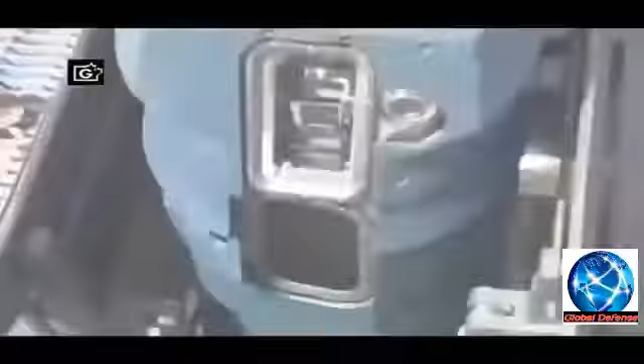The future of submarine warfare is here. The USS Virginia, tricked out with high-tech capabilities that allow it to sneak up to a coastline and secretly watch and listen to potential enemies, ready to respond with unwavering force.

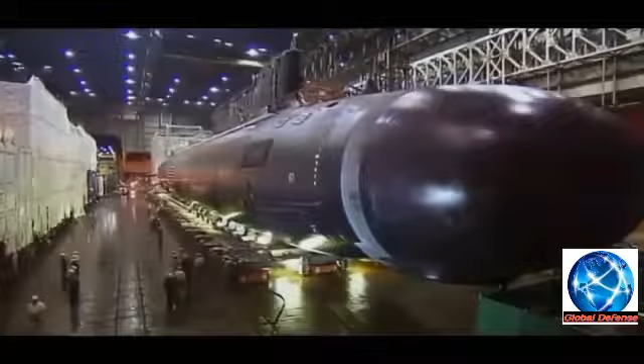This mega sub is in a class of its own, the all-new Virginia class. This is an amazing ship. Named the USS Virginia as the first of a new class, this amazing sub has staggering capabilities. It's the most advanced and versatile submarine in the world. We consider this like the Ferrari of the subclass.

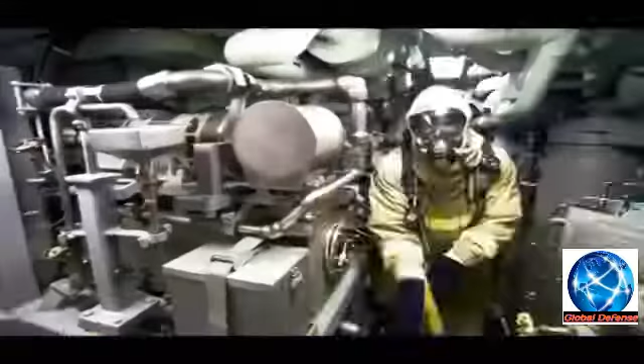It's one heck of a weapon. It can launch attacks on other vessels using devastating torpedoes and can deliver cruise missiles 1,600 kilometers inland with pinpoint accuracy.

To escape potential enemies, the USS Virginia can dive to depths of up to 240 meters.

But what elevates this new supreme sub to a class by itself is its astonishing spying ability. This sub has been called the ultimate eavesdropper, and for good reason. The Virginia has the most sophisticated sensors ever fitted on an American submarine. It can see and hear better than any US sub ever built.

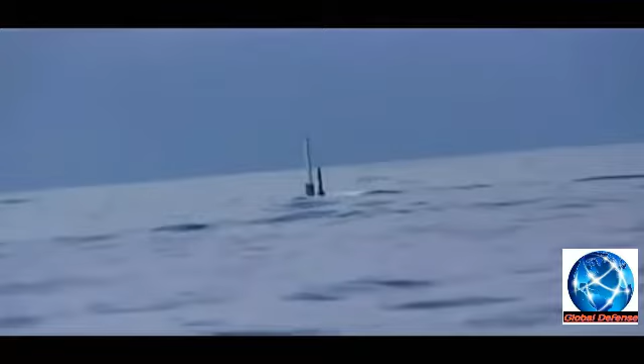But even with such technology, the Virginia must get in close to potential enemies. And she does, extremely close. She uses a revolutionary automatic navigation system, which allows the Virginia to inch itself through shallow waters to an exact coordinate. The question for a Virginia is how slow can you go? How well can you take that 8,000-ton submarine and control it in coastal waters a couple feet off the bottom? Can you move that ship inch by inch?

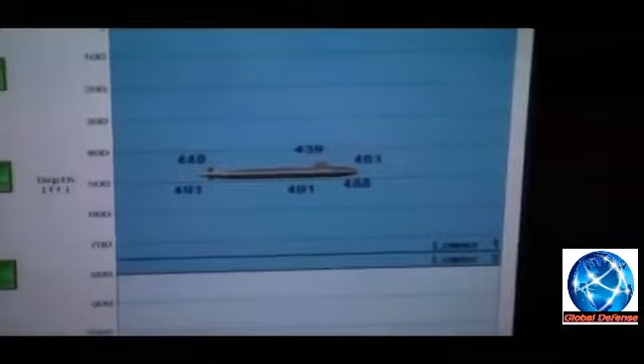Like a stealth fighter, it has the ability to remain undetected. But unlike the stealth, the Virginia can stay motionless underwater for up to 3 months if needed. And we could be sitting there for days and weeks and years, and you'd never know we were there. This is a sub like no other.

With such covert potential, the Virginia's intelligence gathering is second to none. It can also deploy elite forces like Navy SEALs at a moment's notice. Such adaptability makes this sub one of a kind.

And the USS Virginia is one heavy sea creature. At 7,800 tons, it weighs as much as 1,600 killer whales. This monster sub is 115 meters from stern to bow. If you were to lay the Statue of Liberty down next to it, the Virginia would still outstretch it by 22 meters.

But how does such a beast move so effortlessly underwater? The dynamic thrust of this megastructure is a nuclear reactor. The design and operation of the reactor is top secret. But what we do know is that it's an astonishing powerhouse.

A compact nuclear reactor converts seawater to steam. The supercharged steam then spins the massive turbines, which in turn propel the sub. The reactor also powers all electrical needs for this high-tech super sub. And what's more, the nuclear reactor on the Virginia has a 30-year lifespan. Translation, it can go that long without ever needing to be refueled. That's twice the average lifespan of nuclear reactors on other US attack submarines.

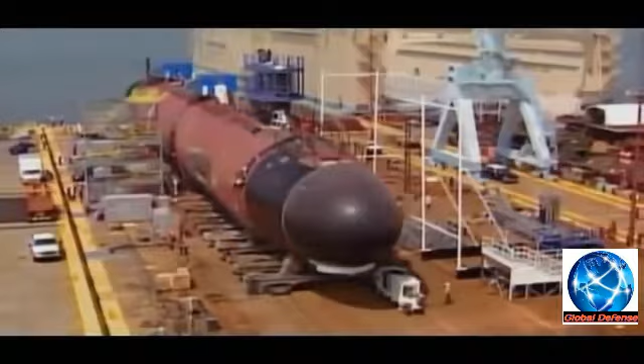But as the 1990s develop, new enemies of the United States and her allies emerge. Small terrorist groups in tyrannical countries like Iraq and Somalia cause the military to rethink spending. If you look at the threats we're dealing with today, a lot of the threats are coming from third world countries, small countries, where we need to take the battle to them and prepare a battle space around their coastlines. What is the point of a huge navy if these terrorist armies have no sea power? Why does the US Navy need a submarine at all?

Good question, and one that was being discussed at the highest levels in the early 90s. In today's complex world, the military needs to be ever more informed of enemy activity. But US defense already has sophisticated spy planes and satellites. They can see every detail from several kilometers high. They also have better ground reconnaissance and a superior spy system. So what can a submarine offer?

In fact, submarines have a lot to offer. The Navy is aware that if they can harness new but unproven technologies, the submarine could remain in shallow waters completely undetected. And what's more, the super spy could stay there for weeks, even months. If a new mega-sub can listen and stay close to enemy lines, it can still be an important military asset.

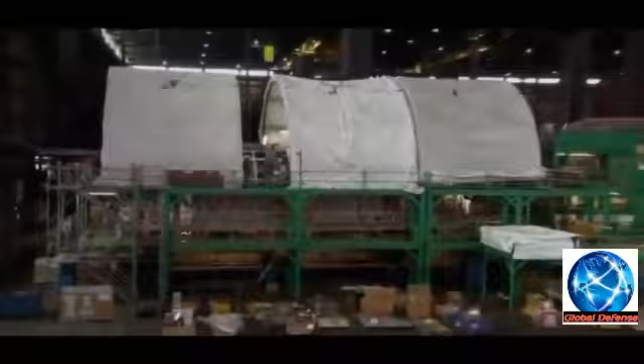It's a tall order by any standards, but there's a catch. They have one year less than it took to build the first Seawolf. And incredibly, there's an even bigger catch: it has to be made for 20% less money. With such constraints, there were many in the submarine industry who thought it was simply impossible. I think the reaction is always one of, how can we do that? We've never done it before.

If the Navy can make this work, it'll provide a major new weapon in the US arsenal. But if they fail, all US subs could be in question.

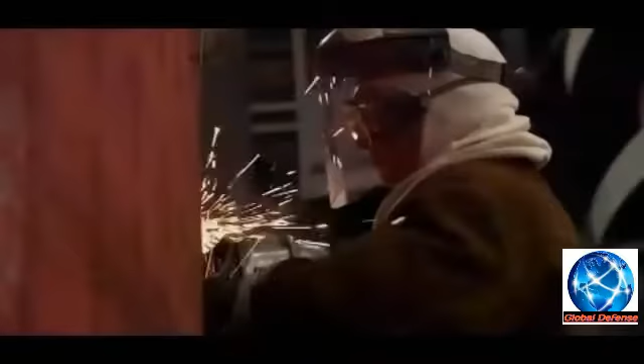It's 1996. The US government needs to get up close and personal with new terrorist enemies. The Navy insists that submarines can still help in this thorny urban war. They claim they can build a new class of submarine: bigger, better, quieter, and more deadly. But there's a catch, a big one.

It must be built in less time and for a great deal less money than the previous attack submarine, the Seawolf class. With such limitations, this project looks more likely to sink than float.

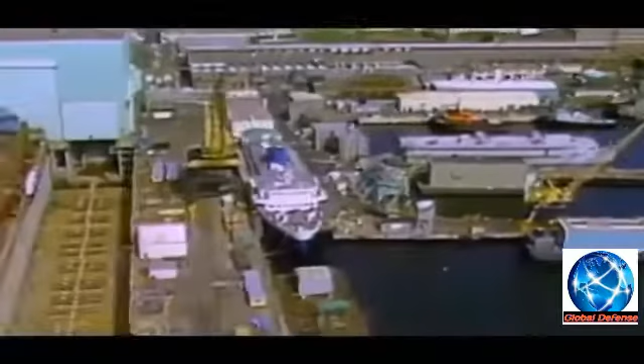The Navy decides to offer the mammoth design challenge to a trusted company, Electric Boat. Based in Groton, Connecticut, this company has enjoyed bragging rights that span over a century of ship and submarine building for the U.S. Navy. The first sub they built was the USS Holland for the Navy in 1900. The USS Holland revolutionized the U.S. Navy, marking the beginning of more than a century of military submarine building.

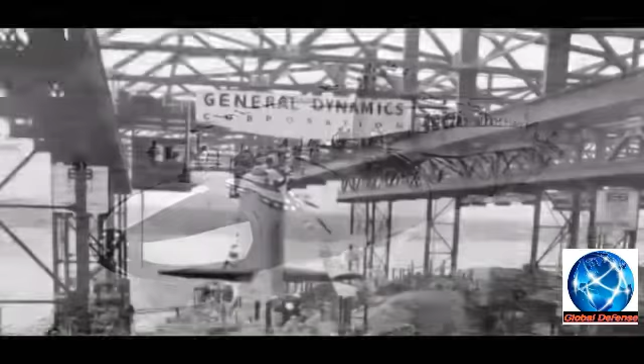Electric Boat's expertise is second to none, but some government officials already fear that this massive challenge may simply be impossible. Despite the huge red flag, Electric Boat finally agrees to design and develop the new Virginia class. But to bring it in more cheaply than the Seawolf, they'll have to completely change the way submarines are built.

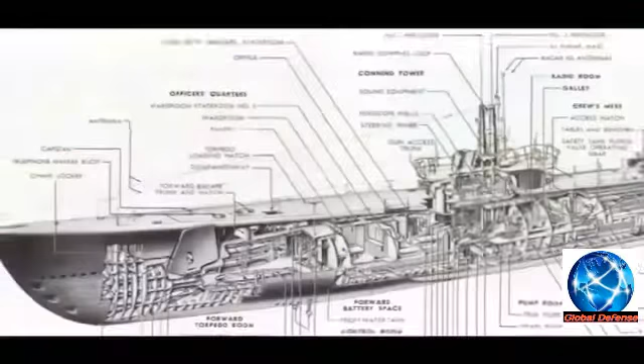It starts with paper and wood. In the past, they would have drawn up initial plans on paper. Previous classes of submarines were designed historically, like probably any other large construction project, with two-dimensional drawings, blueprints.

But the problem with two-dimensional plans is that different designers can't always view each other's layouts. If two engineers from different departments end up competing for the same space, it could lead to lengthy and costly delays. On this tight schedule and budget, there's no room for such error. It'll put the project behind schedule even before it started. It could tip the balance and mean the end of the new super sub.

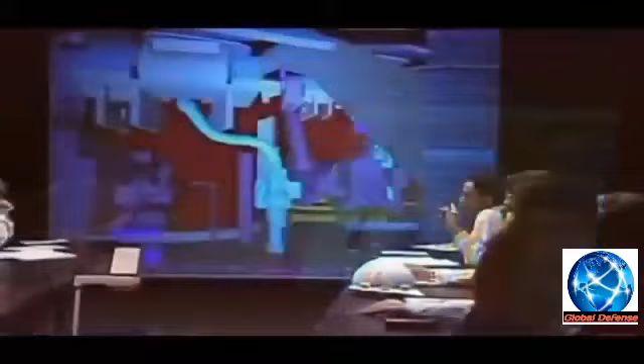The team needs another solution. They turn to new computer-aided technology, the benefit being that the whole model can be seen in 3 dimensions. This will mean that each department can quickly see what the other is doing. If it works, it'll save the company a fortune and help design a more efficient sub. But if it doesn't work, it could mean the new super sub is doomed from the start. The president of Electric Boat finally decides to take the risk. He came in and finally took all the drafting boards out of the plant and said, okay, go for it on your computers.

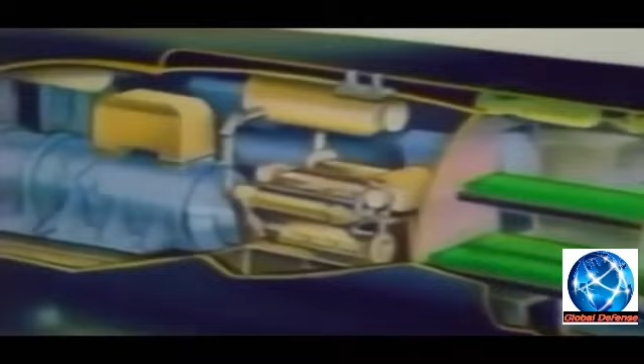Before the Virginia class, when a submarine was designed on paper, builders would then construct a life-sized wood mock-up of the plans just to make sure everything fit. But with the computer-aided design of the Virginia, that step could be skipped. All of the test fitting could be done right there on the screen. It is the first time that a U.S. Navy submarine is completely designed via computer.

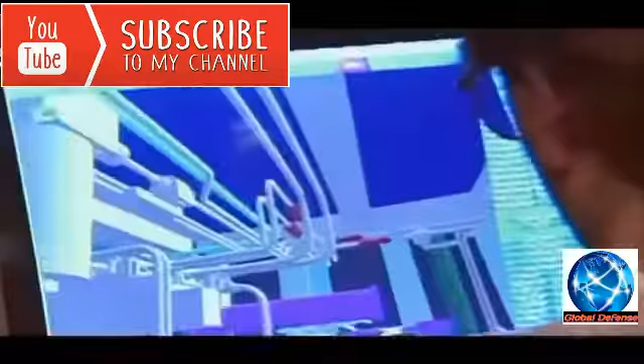And the program that would make this computer-aided design possible is already proven technology. Known as the CATIA program, it has effectively been used in the development of airplanes by the Boeing Corporation. Electric Boat figures there are enough similarities between a plane's fuselage and a submarine to take the plunge.

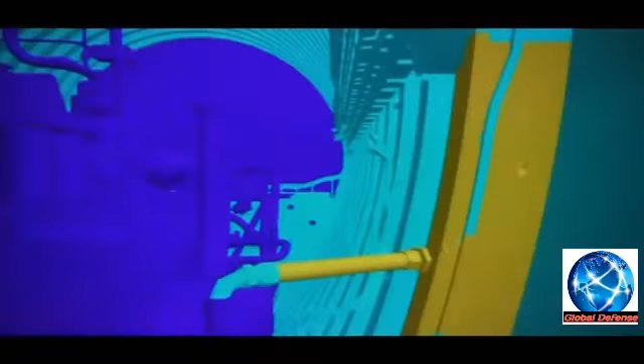It proves to be the right decision. All the various designers have access to the computer 3D model. This allows engineers to work in the same virtual space at the same time. Designers can now view all the plans to make sure they don't interfere with other layouts. The piping designer is running his pipes and I'm running my cables. We can go in and detect interferences day by day.

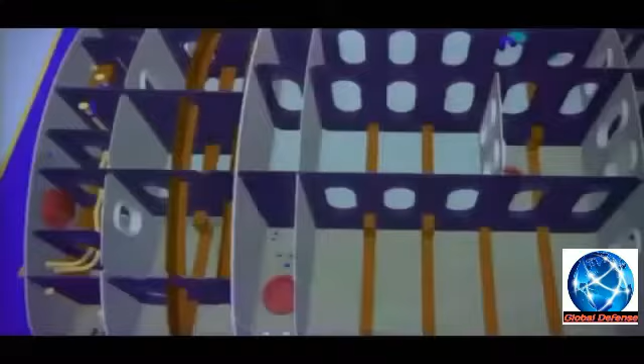Every part of the ship is scrutinized for function and economy. So creating the sub on a computer seems to allow for the more efficient test fitting of systems and parts. But the next challenge facing designers is figuring out how to create spaces for people. Workers need room to do installations, and sailors need space to do their jobs. So in order to ensure those spaces are adequate, designers welcome the help of this guy.

Meet ErgoMan. ErgoMan is a computer-generated image of a human being that comes in 3 virtual sizes: 1.7 meters, 1.8 meters, and 1.9 meters. Whatever movements a human can do, ErgoMan can replicate. Then, when the ergonomically correct envelope has been pushed and a movement is made that is not humanly possible, ErgoMan clearly lets engineers know by simply turning that body part red, enabling the designer to adjust the space he's working on.

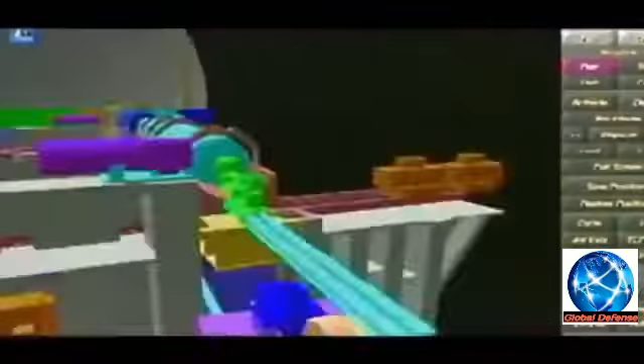This revolutionary technology could save the company millions in costly redesign. It could also guarantee that the crew will operate at maximum efficiency. The computer-aided design also helps in one other crucial way. The future of warfare is uncertain. To meet that uncertainty, this incredible sub must be able to adapt to new situations. As modern warfare changes, so the Virginia must adapt to meet it head-on.

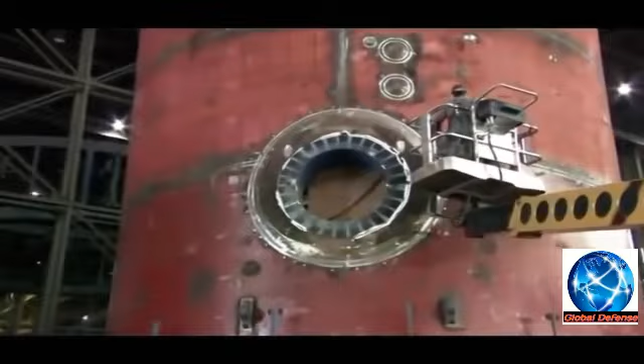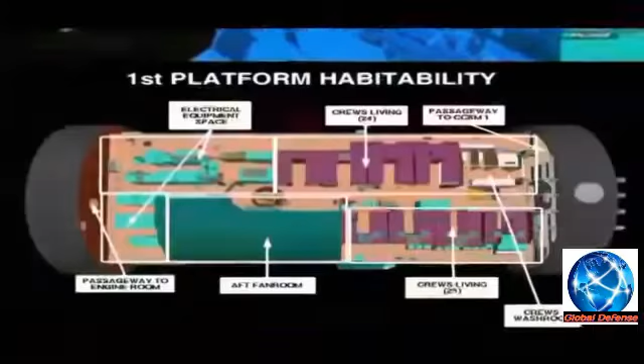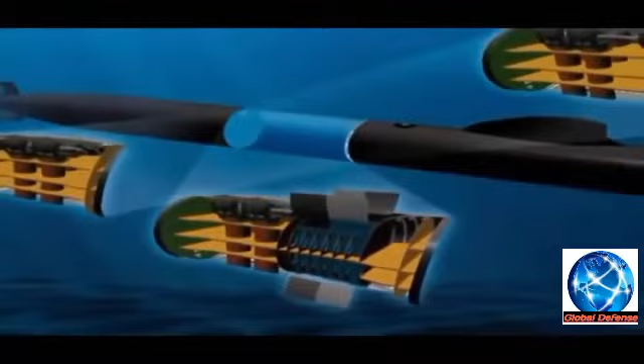To create this adaptability, the designers of this super sub create what's called a modular design that incorporates an open system architecture, meaning the skeletal structure of the sub includes large open spaces. These open spaces can house prefabricated modules such as weapon systems or sonar technologies. These modules can easily be inserted as one complete unit. This modularity will allow future versions of the Virginia-class to house newly developed systems in the existing Virginia-class layout, without the added expense of having to develop an entirely new class of submarine to house new technologies and capabilities. A remarkable cost-cutting development in the design of a submarine.

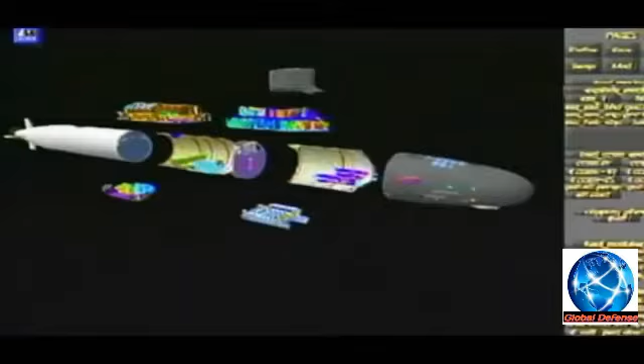If it works, this will be the most extraordinary submarine commanding the world's oceans. But designing it is just one problem. Making this ambition a reality is quite another. With an even tighter budget than past submarines, this is going to be a massive challenge to execute. And now there's a new problem. Having spent millions on the design, the Navy may not have enough money left to build it. It looks like the prototype of the new Virginia class may never surface.

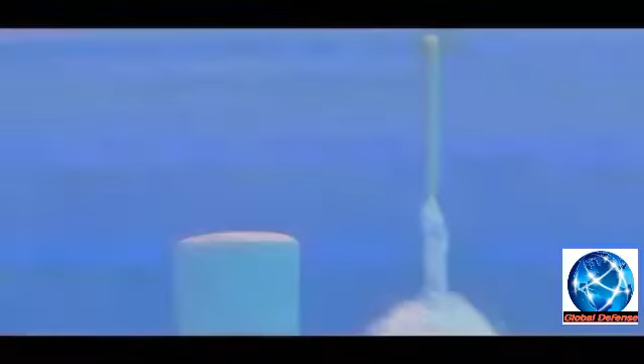The Navy is underwriting an enormous new project to build a new class of submarine that will be more versatile than any ever built. But it has to be constructed in less time and for less money than the previous attack submarine, the Seawolf.

The design and development have been skillfully and successfully carried out by Electric Boat. And for the first time, a US Navy submarine is completely designed via computer. It's a massive achievement, but there's a problem.

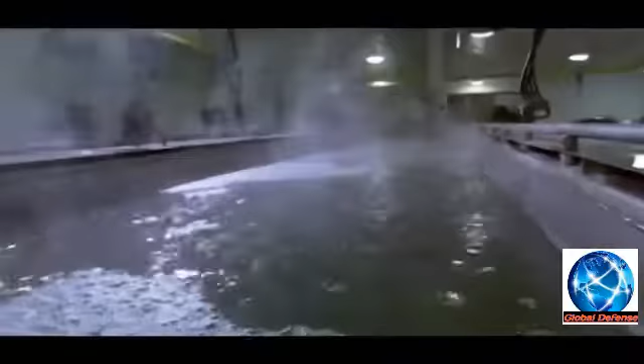The Navy's budget for the Virginia program is running out. It could lead to the end of the new super sub before it's even floated. But then Electric Boat does something unprecedented in its history.

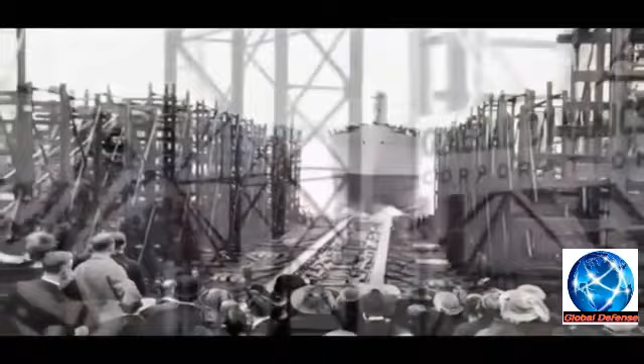For years, Electric Boat has been in competition with Northrop Grumman's Newport News, another heavy hitter in the shipbuilding industry. Now Electric Boat proposes that they combine forces with their old rivals and do something that's never been done before: build the submarine together, a process they call teaming. They figure that combining resources and brainpower will allow them to work more quickly and more efficiently. The proposed alliance can lead to massive savings, $700 million off the cost.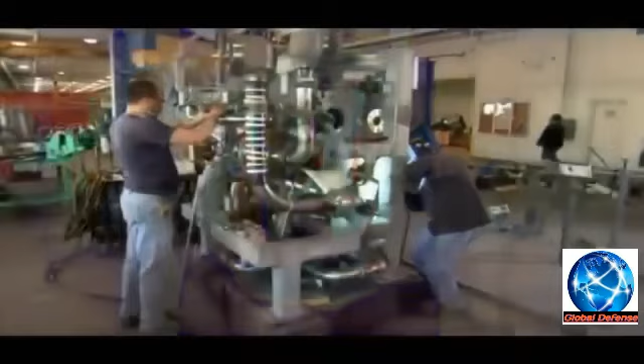But can these two historic adversaries put aside their differences and build a super sub for a reduced price? How can they manage such a massive project across two companies? As we've said, it's never been done before. But the allied companies must make it work. They have little choice, as the Navy has no more money to offer.

Making a super sub for less money and in less time than previous attack subs will only be possible if the two rivals collaborate. It's a colossal and dangerous undertaking. If they get it wrong, it could spell the end of the US submarine program. This is a time when the Navy must prove a submarine's worth in a changing world.

The two-company alliance agrees that the only way to meet such demands is that there can be no delays. A major setback could erase any cost savings. But such efficiency in submarine construction is unprecedented. Is this project simply too ambitious? Could it be destined for the deep?

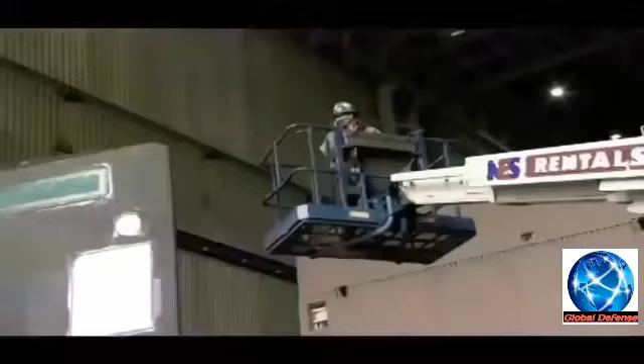In 1998, construction finally begins. Like all submarine building, it begins with the most crucial component, the hull. This is where the crew and weapons are housed. If it's not strong enough, the lives of hundreds of men are at stake, as is the multi-billion-dollar submarine.

Not just a costly mistake, it would be a national catastrophe. Consequently, the hull for this sub isn't just made out of simple steel. It must resist unbelievable pressure.

The Virginia class needs to reach depths up to 240 meters. Here, it's difficult for an enemy to find them. It'll give the submarine maximum safety from attack or detection.

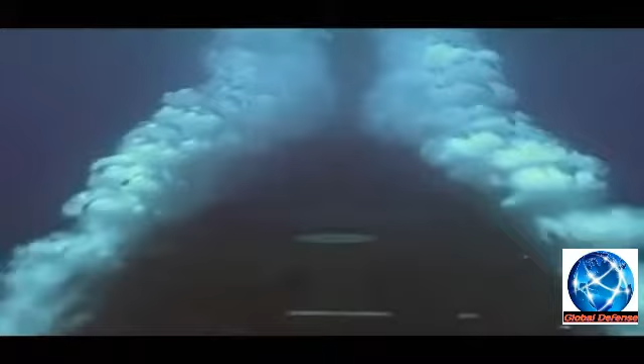But at these depths, there's immense pressure. The steel hull must withstand a massive 26 kilograms of force per square centimeter. That's the equivalent of a dinner plate strong enough to hold up the weight of an elephant.

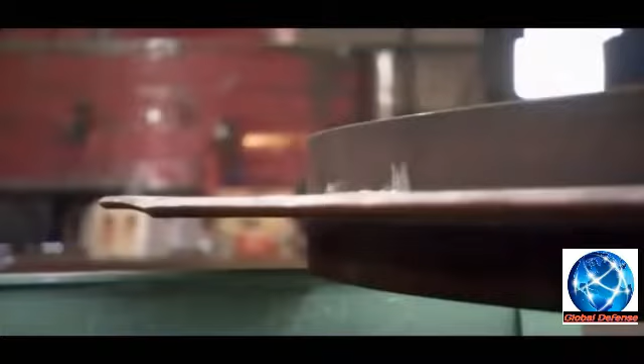Getting the steel strong enough to endure such pressure is crucial. The manufacturing of this special metal is a military secret, but suffice to say, it's strong. Extremely strong. But now the problem is how to bend such heavy-duty steel.

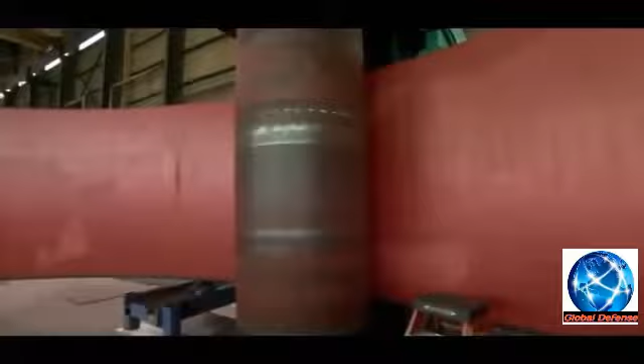They use a machine that supplies up to 4,500 tons of pressure. That's over 30 times the pressure exerted by a car-crushing machine. The massive drum shapes and bends the huge plates of steel.

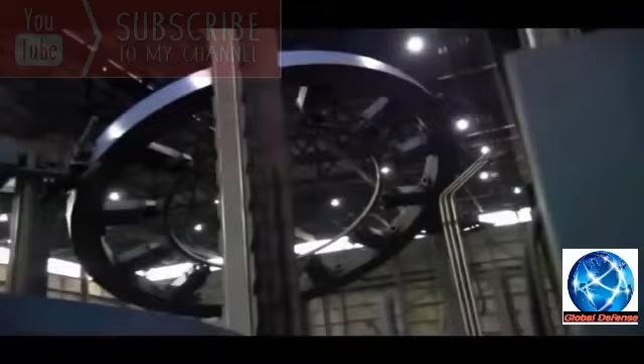Once bent into shape, the steel is mounted onto rib-like frames. It's then welded together into cylinders. This is a critical moment.

In the past, this was done by teams of hand welders. But such are the stresses on a deep ocean submarine that even one bad weld could lead to disaster.

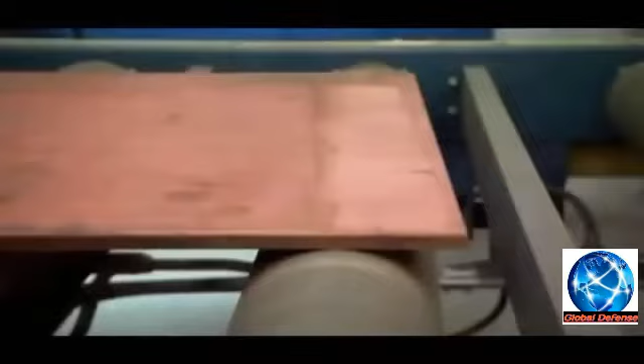There's only one answer: robots. These assembly robots can work round the clock and rarely make mistakes.

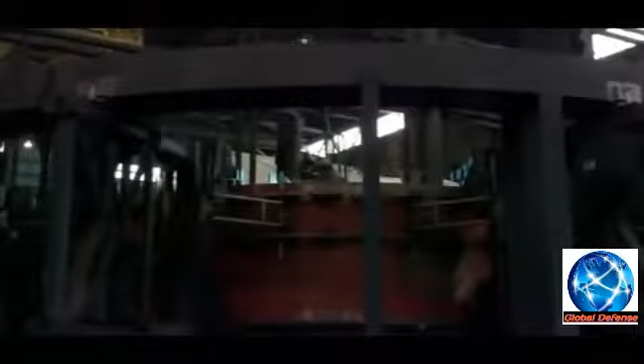The weldments that go in out here are better than 99% first-time yield, which means the inspection process shows less than a 1% failure rate. It's a costly business, but this is something that can't afford to fail at any price.

To make sure the welds are perfect, they're inspected by X-ray. Any imperfections, such as an air bubble in the weld seam, could be just enough for the hull to weaken. It could then give way to the crushing forces exerted deep below the surface. If the X-ray machine shows up any imperfection, it's meticulously repaired.

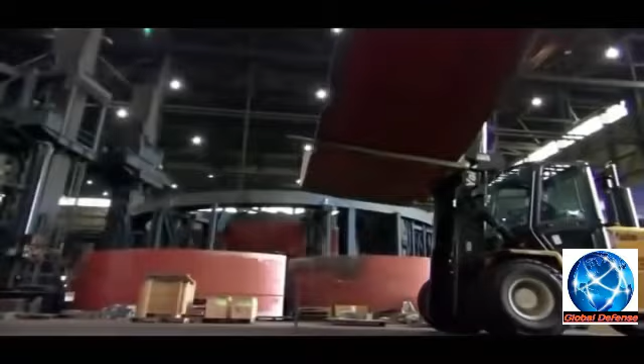Amazingly, once the seam is perfect, the welds can create a bond that is actually stronger than the original steel, a comforting fact when you're 240 meters below sea level. Once the separate sections of the hull have been created, they start to construct the skeleton.

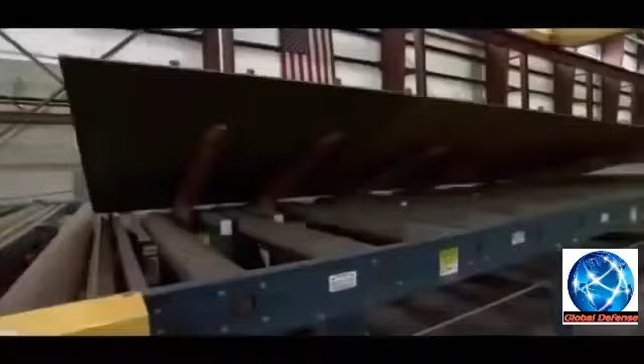Here in steel processing, they'll make floors, walls, and all the sections that comprise the submarine's framework. Robotic manufacturing reduces mistakes and speeds up the process. This is crucial when the alliance companies are desperate to cut costs and time.

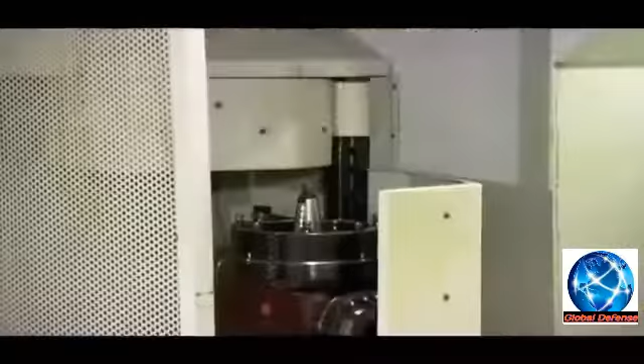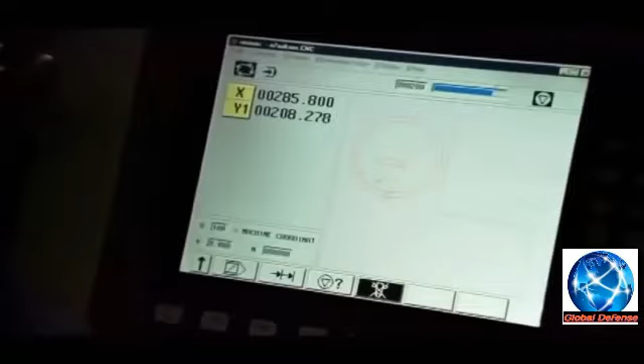Today, modern technology means we're working with electronic data that comes right over the line and feeds the machines. This incredible laser marker is one of a new generation of robotic assembly tools, designed to eliminate human error. It's programmed to follow the computer design with better than pinpoint accuracy. Basically, it's the only marker of its kind in the free world that we're aware of.

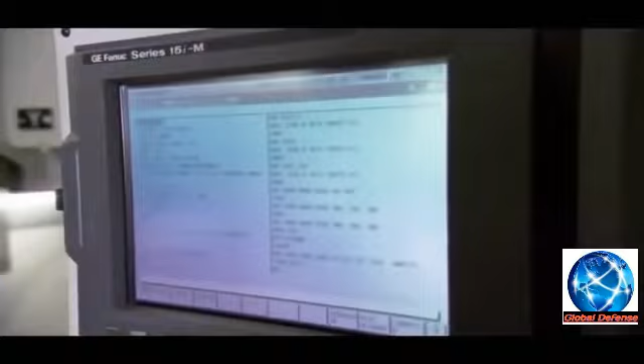But will this new technology work? It's never been used in submarine construction before. The machine passes quality control with flying colors. It's just one of many innovations in building this unique sub. So far, the project is going well.

Now the marked steel must be cut. But how do you cut such strong steel? They use a hugely powerful cutting machine known as an abrasive water jet.

Here, a constant stream of water acts as the propellant for 80 grit flakes of garnet, which cut through the steel. The advantage to this method of cutting with a cold water propellant is that there is no heat-affected zone, thereby eliminating imperfections caused by expansion, contraction, and melting.

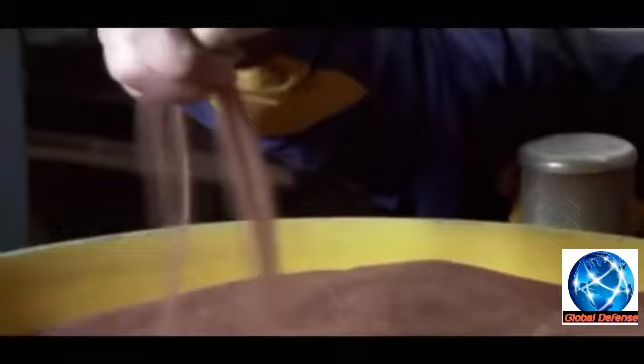Even though garnet is not the hardest abrasive that could be used, it's seen as optimal because it's hard enough to cut without causing too much wear and tear on the water jet's nozzle. The powerful cutting stream strikes the steel with 3,900 kilograms of force per square centimeter. That's strong enough to cut through a 30-centimeter thick piece of steel.

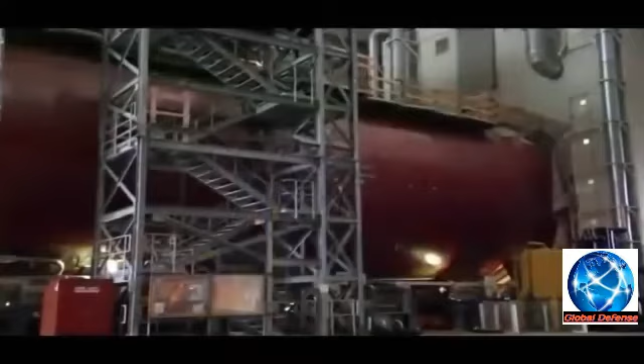Once cut, the sections are ready to be welded into place. This makes up the submarine's skeletal shape. While these sections are being built, other important modular sections are constructed in tandem. Living quarters and weapons are built outside the submarine before final assembly. This allows ease of construction, and each module can be rigorously tested before installation.

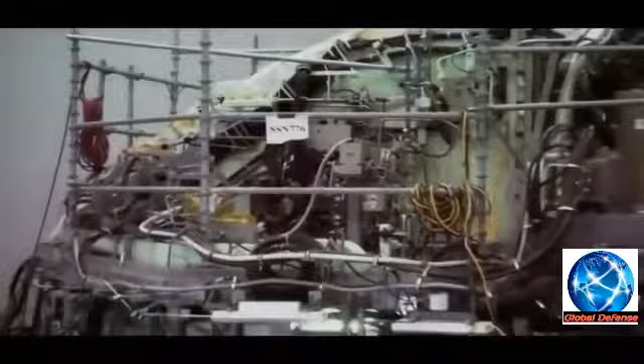The Virginia's command and control module is the most complex module to be built. It's the brain of the sub, where crucial functions are executed and surroundings monitored. It's also where the awesome weapons systems are controlled. If any part of this goes wrong, the whole submarine could be rendered inoperative and end in a voyage to the bottom of the sea.

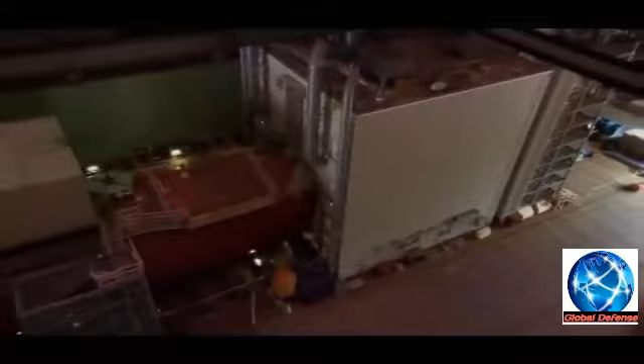So the Virginia's separate elements, the modular systems, the internal structures, and the outer hull are built with efficiency. But these separate sections have not yet been integrated into a complete submarine. And without a complete submarine, the sailors destined to serve on the Virginia can't set foot onto it and get a feel for its inner workings. Yet they must have a working knowledge of the Virginia's unique operating systems when they're charged with manning the complete submarine.

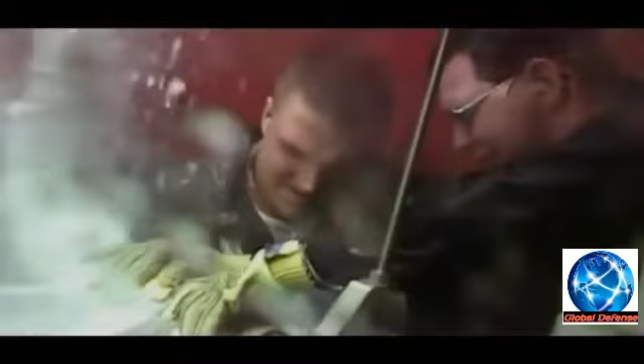So how do sailors prepare for duty on board this unfinished sub? The Navy would have to get creative to ensure that the human element to this mega sub, the US Navy submariner, would also be finely tuned for service. This is when the mission could sink or swim.

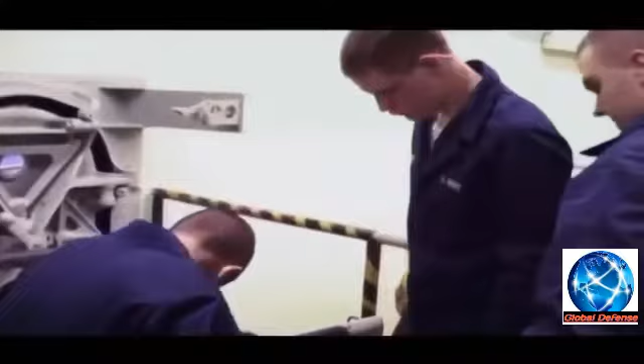The USS Virginia is a super sub in the making. Nothing like it has ever been built before, so there's no chance of gaining crew experience from other submarines. But the new sub must be fully tested before sea trials. That includes the crew. To operate this new class of submarine will require unique training. But this is a virgin sub, and no one knows all its workings. Like the rest of this project, this too will be a challenge for the Navy to resolve.

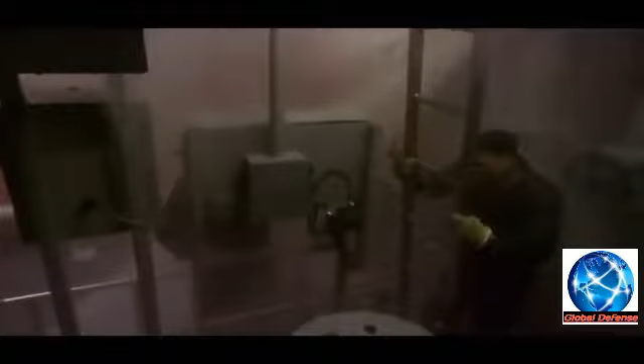Training begins with every submariner's nightmare, in mock facilities like this fake engine room, built to simulate a flood. Even though these men are not on an actual sinking sub, this scenario is very real to them. They know that a flood could happen when they're at sea, and the only way to survive it is to stop the water from rushing in.

Flooding in the engine room! When a sub starts flooding, it becomes a race against possible death for everyone on board. Flood control has been activated in the engine room. Phones are manned.

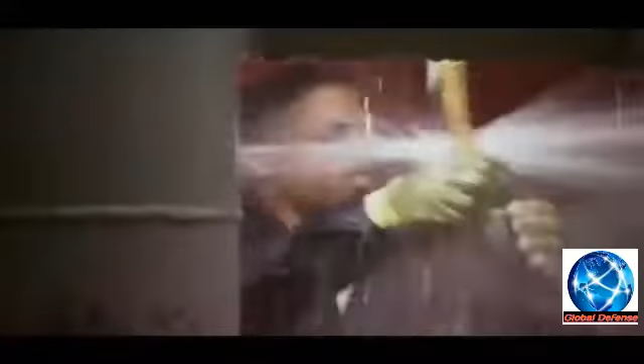In the heat of battle, the sub can't resurface because the enemy will spot it. If too much water gets in, the sub takes on too much weight, permanently ditching itself on the ocean floor. The men cannot escape through the hatch because they're so deep; the water pressure will crush them. If they can't stop the leaks, they will be trapped at the bottom of the ocean, buried alive in an iron coffin.

Hammer. These sailors are under the close scrutiny of their commanders. Slow down.

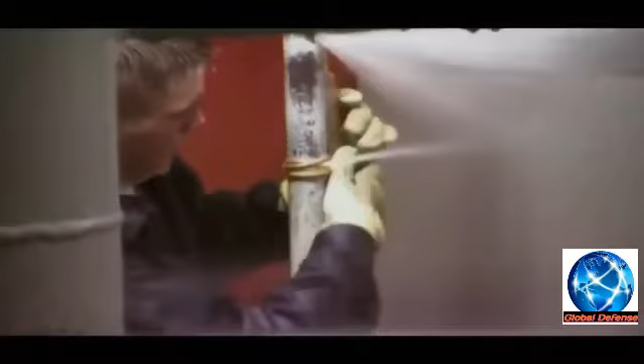To block small leaks in pipes, the sailors hold plugs in place with rope they call bandit twine.

For larger leaks, the sailors patch the holes with rounded metal plates called strongbacks, which are secured with metal straps simply called bandits. Don't take it apart, tie it up.

Commanders expect the sailors to keep their cool and keep their focus. Fortunately, after a rigorous and stressful series of tests, these sailors get the thumbs up from their commanders. These are good men to be spending months on end with, and that's what a sub is all about.

Living in cramped conditions and still functioning well in the face of danger. This is no place for claustrophobics.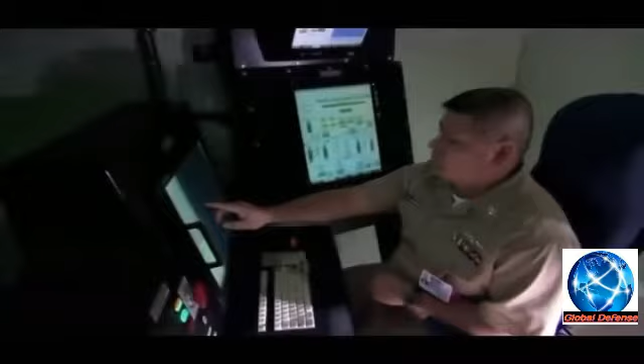Every detail of this high-tech simulator is a functioning replica of the future sub's control room. This is a very unique trainer. It's specifically for the Virginia class.

For the first time, the crew get their hands on the same controls as the new super subs. We were confident that the ship was going to act very similar to the trainer as far as motion, but the procedures and everything that we train on over here are identical to the ship.

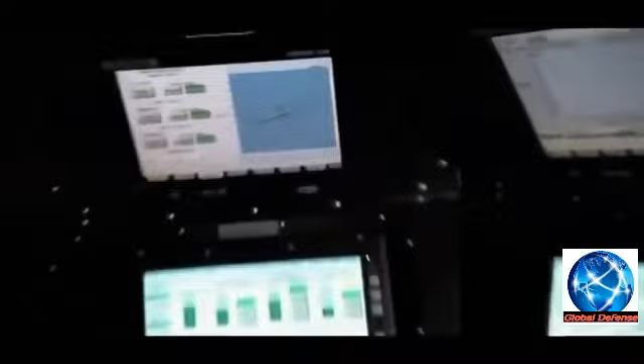All back to thirds. Sonar, no longer hold air.

One thing sonar operators on the new sub will have to get used to is working alongside their colleagues. Sonar has always been monitored in separate rooms to avoid noise interference.

Starboard. But sonar operators destined for the Virginia must get used to working in the new shared space of the control room.

Pilot sonar, no longer hold air, escaping from the aft main ballast tank.

After initial reservations, the sonar team begin to see the benefits of working with other engineers.

I think overall, in the big picture, it's a benefit. It gives me, as a sonar supervisor, a larger tactical picture of what the boat is doing.

And because they're all in the same room, communication is much more responsive. Control, and I'll brief them that we've gained an enemy warship.

While the crew is being put through their paces, construction of this super sub nears its end. The separate hull sections are outfitted with the internal elements they'll house. And then they're pieced together section by section until a full-length submarine finally emerges.

By August 2003, the USS Virginia is ready for the water.

Against all odds, the alliance companies have done it. They've built an extraordinary new submarine, more technologically advanced than any in the world.

It's an amazing achievement. Right now, any celebration could prove to be premature. Unless they get the next and most important phase right, the whole project could become an expensive flop.

Virginia must now endure extensive sea trials. The super sub has to prove itself where it really counts, in the ocean.

Often in the past, testing new subs has uncovered countless problems. These have proven to be time-consuming and extremely costly.

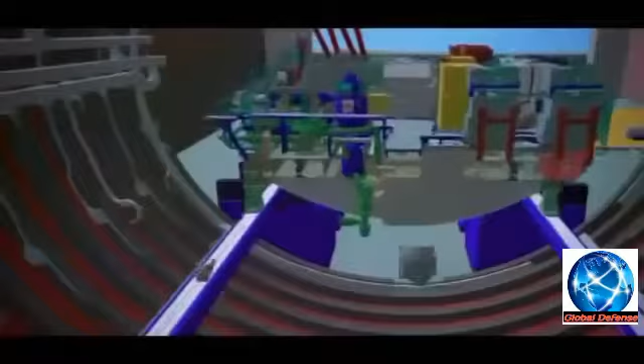The USS Virginia has been built using revolutionary methods. Time and vast quantities of money have been shaved off the budget.

But if this new super sub is to succeed, there can be no slip-ups during trials. It'll knock the whole project off course.

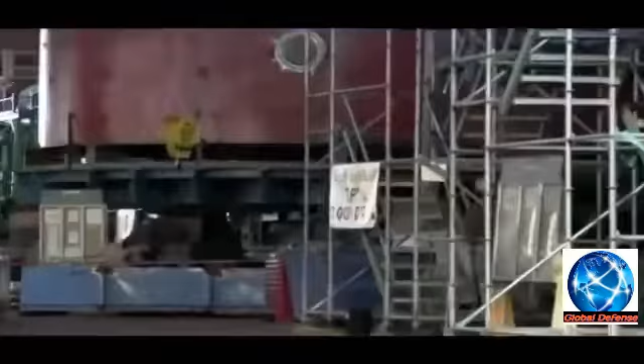The construction of the all-new USS Virginia is at last complete. It's taken 6 years and cost the Navy billions of dollars to build, but it's still less time and money than its predecessor, the Seawolf. It's a mammoth achievement, but by itself, it's meaningless. The real test lies ahead.

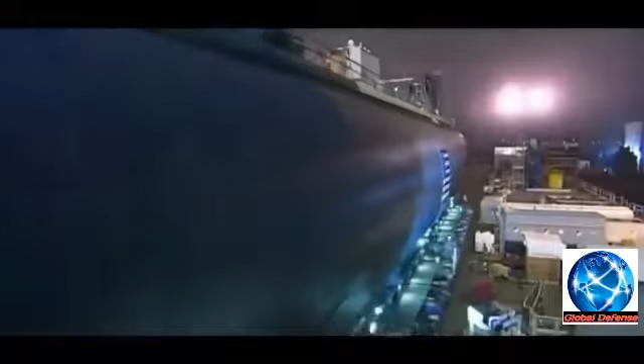If there are errors now, the huge investment could sink to the depths. It could take years to fix any problems that surface, likely putting the project beyond economic sense, and could even spell disaster for the whole submarine division. In the past, problems have been common at this stage, but this project simply can't afford to fail.

It's now do or die for the new Virginia class.

August 2003. The USS Virginia is finally launched. Over the next several months, they will put the sub through extensive tests, known as alpha trials. This is when things can, and often do, go wrong.

Previously, subs would factor in time for repairs, but in this new economic climate, the Navy and the Alliance simply don't have that luxury. The Virginia must ace the test.

Historically, the first ships of a class wind up with significant problems. As the USS Virginia heads out on her maiden voyage, the captain and crew will begin testing all her major functions. All the sub's technology must be tested.

They start with sonar. It is the traditional way a submarine sees, even through murky water. The system is based on transmitting and receiving. The main feature of the system is the sonar sphere, housed in the nose cone.

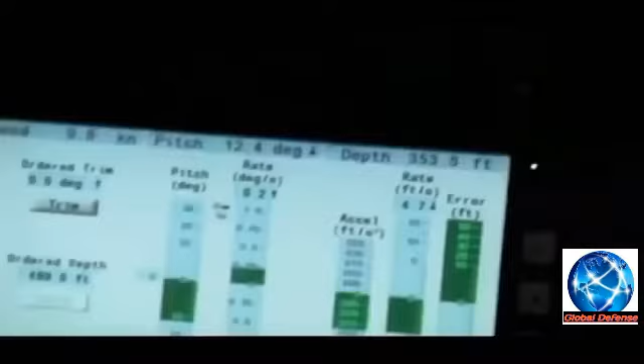Another defining characteristic of the Virginia class that makes it highly adapted for these shallow water environments is its precision handling. Ahead one-third. Just like any submarine, it uses a propulsor to adjust speeds.

Rudders and planes are used to steer the ship, and the Virginia, like all submarines, uses buoyancy to go up and down. To go down, air is released from ballast tanks, and seawater flows into the tanks, weighing the submarine down and causing it to sink.

To go up, pressurized air is pumped into the ballast tanks, forcing seawater out, making the sub lighter and causing it to rise. Water can also be pumped throughout various trim tanks on the sub to keep it in balance.

These various tools are universal to US Navy subs, but what's unique about the Virginia class is that they are all dialed into a central program. Mr. Deckman, you have 200 feet. So when we set in the course and we set in the depth, it stays at that depth

and at that course until we change it. If the Virginia were to park itself on the ocean floor, currents and tides would cause it to drift. But the Virginia's automated hovering capabilities allow it to maintain its position near the ocean floor, compensating for currents and tidal forces. The Virginia's unique ability to remain locked into position provides another major innovation.

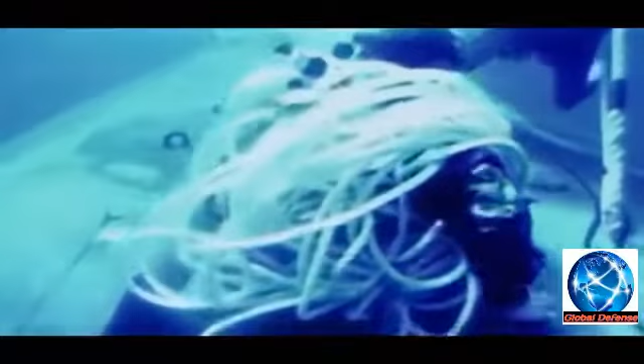As the sub can remain in a fixed position, it's easy for elite forces like Navy SEALs to swim in and out of the escape hatch. No other US submarine has a more effective way of deploying special forces.

No other class of submarine in the fleet has a built-in Navy SEAL staging area. This 9-man lockout trunk allows an entire team of SEALs to exit and enter the sub. Once out, they grab mission-specific supplies from lockers located in the fin-like structure on the top of the submarine, known as the sail. And then they're ready to make their quiet approach to land.

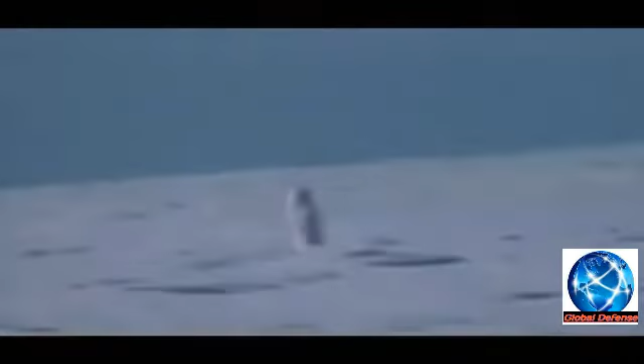And if the Navy SEALs need fire cover, there's more than enough on board. The Virginia comes fully armed. There are 12 rocket launchers for firing Tomahawk cruise missiles. A target up to 1,600 kilometers away can be strategically destroyed. 4 torpedo launch tubes are ready and armed to eliminate any surface threat.

But when it needs to, the Virginia can simply disappear. To remain stealthy and avoid detection, the Virginia is designed to maneuver in total silence. The Virginia-class sub has a giant duct around its propulsor for noise reduction. And the entire hull structure is covered with a rubber-type coating designed to make it more hydrodynamic.

It's much like driving your car at high speed down the highway. If you have the windows rolled down, you can't hear the radio because of all the air noise blown by you. Much like Virginia, when we're driving fast with all this flow noise, we can't hear from our own sensors. So we want to quiet down the ship as much as possible, make her hydrodynamically smooth, so there's not a lot of flow noise, so we can hear from our own.

Without the combination of these noise reduction technologies, the Virginia couldn't even hear its own sensors. The sound dampening allows them to hear and know what's out there.

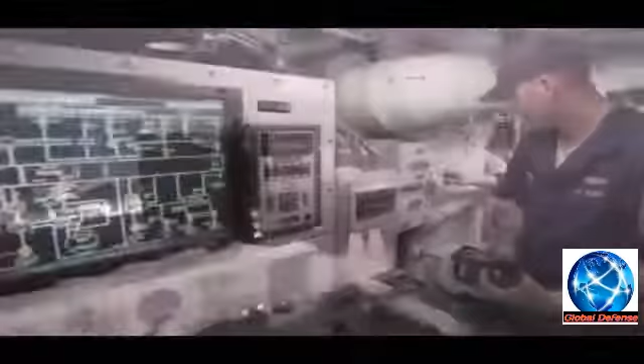After rigorous testing of all the new systems, technologies and crew members, at last the alpha trials are over. To everyone's amazement and utter relief, the USS Virginia has passed the alpha trials with a clean sweep.

And it was great to see it return after alpha trials and understand from the 4-star admiral getting off that ship that it performed flawlessly, that he was very pleased with its design. They came back with a broom on the sail, which to us signifies a clean sweep. A clean sweep means the ship passes every facet of the test.

It is one of many stellar performances. All the trials that I've accomplished since in command have been a great success. The ship has exceeded its expectations in every trial. This truly is a remarkable design.

Normally, when a nuclear-powered submarine is built, a year of testing and then another year of repairs are built into the schedule. But because the Virginia performed so well during testing, that year of repairs is not necessary. Everybody pitched in, and it was a tremendous effort. It was a great program to be part of, and I'm most proud of the people that made it happen.

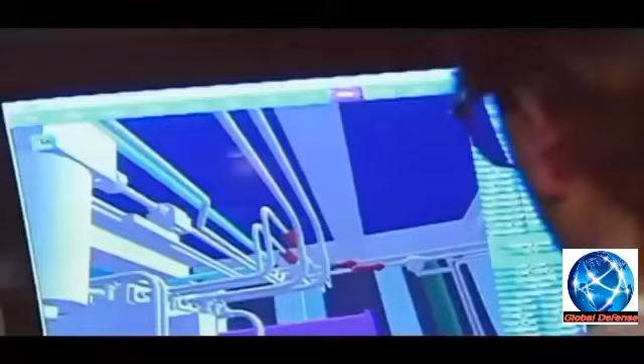The Virginia's readiness for service proves that the computer-aided design approach to creating a new class of submarine is the way to go. And that new technologies, combined with the resources of two rival shipbuilding companies working as a team, can yield an affordable submarine with new capabilities.

When parked in shallow waters near coastlines, it can support ground force operations and participate in land-based military activities. New capabilities allow this new class of submarine to be more than a warship built to engage enemy navies in the open ocean.

The USS Virginia, the first of the Virginia-class submarines. The conflicts that this new breed of submarine are destined to face over the course of the next few decades are unforeseeable, and many of its missions may never be known because they're likely to be top secret. What is known is that whatever its destiny, the USS Virginia is poised to answer the call of duty.